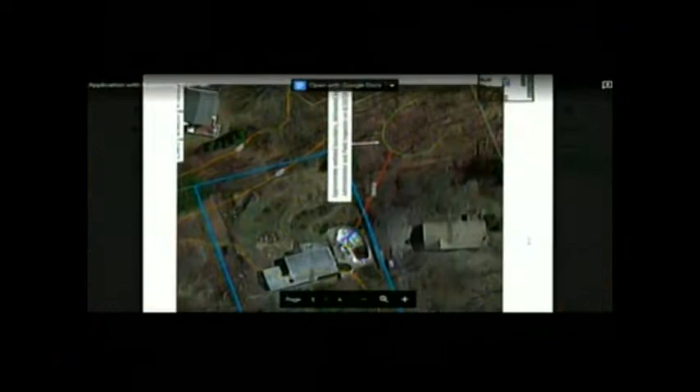At the last meeting, the commission asked for a narrative explaining construction access and intention to remove compost and yard waste within the 25-foot no disturb zone. The applicants had informed the commission they'd be on vacation this week, so they wouldn't be able to make it, but the commission said that as long as we get a narrative to this effect, that would be okay.

So they will be accessing the area of work from the front of the house, down the driveway and the front of the house, which is out of the buffer. They have existing fencing that separates property boundaries. They will be removing the stockpiled compost and yard waste from the no disturb zone, and they will either burn it or put it into the pool that's going to get filled.

So, I did watch the video on that, I know that's his response to this. I cringed when I watched it. You cannot put compost as backfill in your pool. So we're not going to let that happen, okay? Because I don't want it to happen.

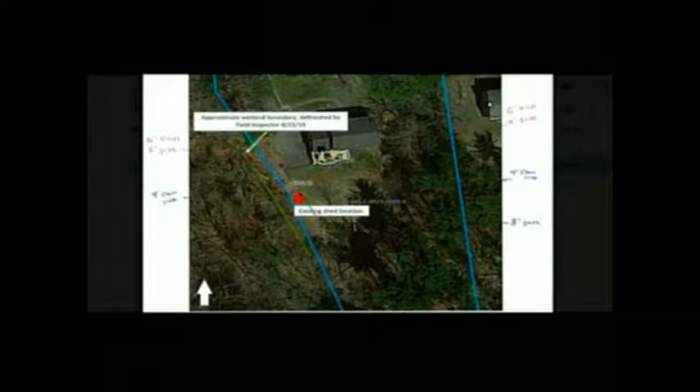My thing is, if he brings the fence forward and he's outside the 25 and it's just like hand-dug posts - we don't know where the wetland is, or where the 25 is, or the 50, on any small project. Well, I'm saying that's why I asked for an RDA, so we know where the wetlands are, where the fence is going to be.

Well, I think it's a discussion you can continue to have with staff. I mean, it may be barely an RDA. Well, there may be other things that he wants to do with the property, which may change things down the road. And the fence, maybe, once the wetlands get delineated, he'll have a better idea of where the zones are and where he was thinking to do other things.

Fair enough. I think there's other plans, it's worthwhile. It helps, it's a planning tool that can help him make other decisions. Yes, exactly.

When you were out there, it looks like the wetlands start right at the edge of my property. So if I put a fence 25 feet in from that, essentially it's a fence going down the middle of my yard. So I can get the official delineation done, but I'm just concerned because I know that's also expensive.

I called some of the consultants - they charge $500 to $800 to do surveying and delineation. So I just want to make sure I can go through that process, that the fence is reasonable, before I spend all that money through the delineation process. I'm just not sure if you guys can provide me guidance on that.

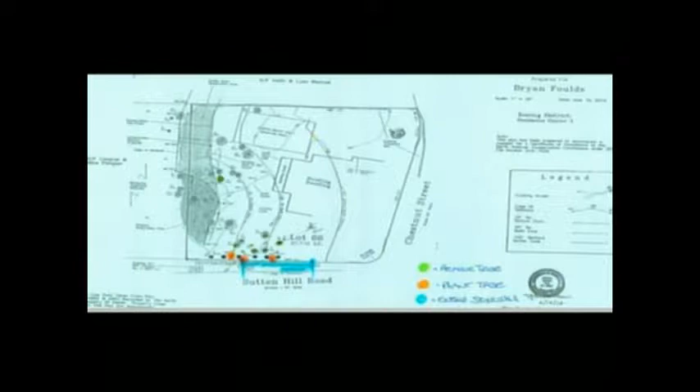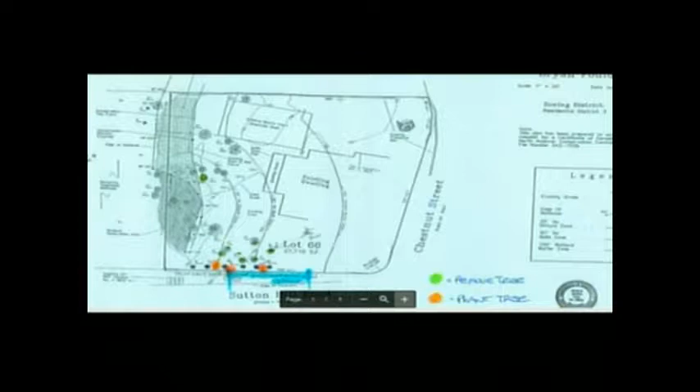Ben had conducted a site inspection, initially just for tree removal, to see if there's any discussion that needs to take place prior to moving forward on any of it. There are 9 trees coming down, in the backyard and a few in the front, the ones in the front being in the outside buffer. Most of them are dead or dying or diseased, and it was very obvious to Ben when he did the site inspection that that's the case.

So the green markings are the trees that are coming down, and the orange are proposed replanting. There's also an existing stone wall for part of the frontage along Sutton Hill Road, and the applicant wishes to extend it, shown in the blue.

So I'm seeing most of the trees to be removed outside the 25-foot zone, but I am seeing one that's... there's one back there. It's got about half of the base left in it. So what do we know about that, Amy? We have a picture of it. So the base of it is rotted, and it's spindly.

So it's already, even though it's very close to the wetland, it's already in an improved lawn area. So we'd allow it to come down, but they wouldn't excavate the stump, they could grind it flush for them. Wouldn't even do that. If you look at the one right next to it in that picture, the stump is protruding out of the ground, so they wouldn't have to go through the ground.

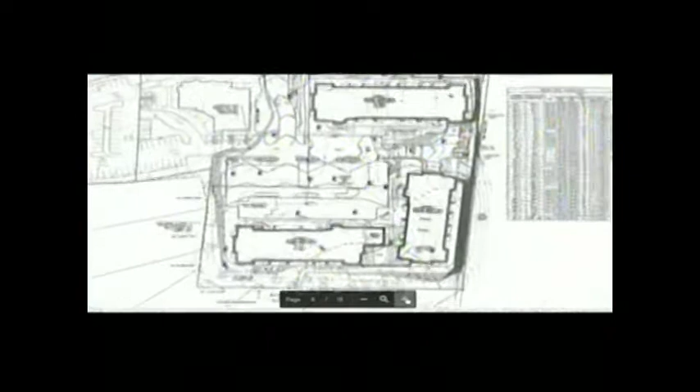So since the last meeting, the planning board closed and approved the project. I conducted a site inspection with the wetland consultant, project engineer, and abutters. And we have the final revised plans here up on the screen. I'm going to ask the project engineer to give us a briefing, and then I asked him to do a visual for pre- and post-watershed, so we understand where the water is going pre and post on a visual level.

Good evening, thank you for having us tonight. For the record, my name is Scott Cameron with the Morin-Cameron Group, 66 Elm Street in Danvers, Massachusetts. Here on behalf of Sutton Street Redevelopment. Thanks for having us tonight.

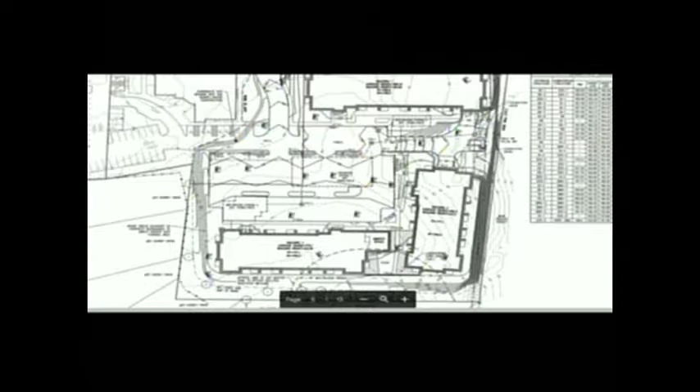I did bring with me, and presented a little bit of this at the opening hearing, we had a close look and spent a lot of time back in the area on the property. I know there's been some question about what's going on with the grading along this back area, whereas the rest of the property is pretty distinct where everything's going. You have a very flat area through here.

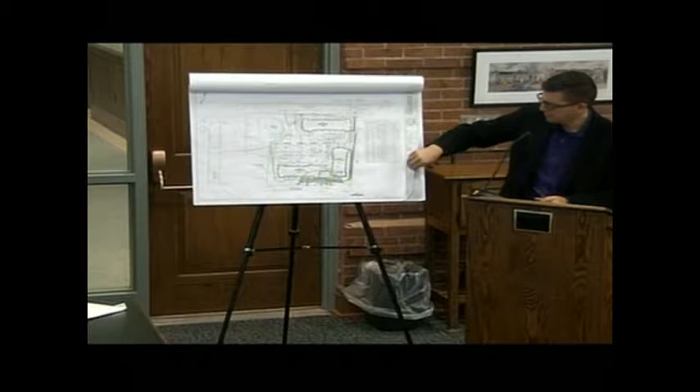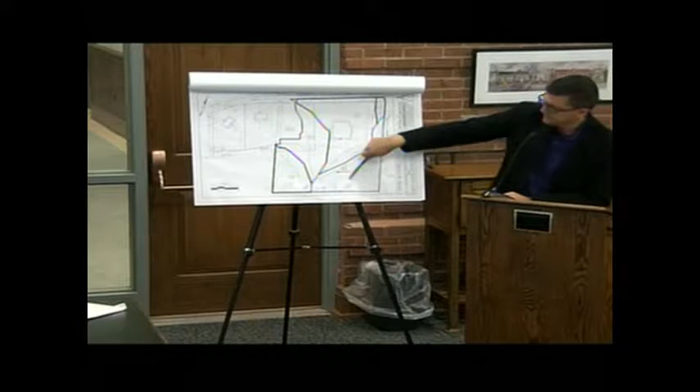When we were doing our stormwater analysis, I'll just pull up the existing conditions plan. This is the watershed plan that was in the drainage report, I just blew it up on this board. Really, there are four distinct watersheds you can break out on this property. They go to different locations. The one we're really talking about is where the isolated wetland is, off-site with the buffer zone coming in, and this blue represents the land that's immediately adjacent to that.

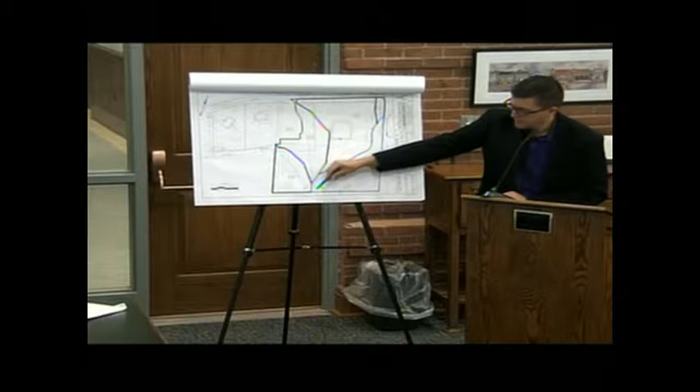The design point we modeled for this is more or less along this entire edge abutting the China Blossom Restaurant. The reason is along this lot line, and it's subtle, but if you read the contours, no matter where you pick a point for a drop of water to fall, that water moves away from the lot line. You measure perpendicular to the next contour, typically, and it comes down. Then you go out in the field and take a close look, and you can see why.

It's very flat back there, there's trees, and it's lumpy in some areas, but the grade, as you stand there, you can see it—it's subtle, but it does go either parallel to or just away from the lot line, and all this comes down.

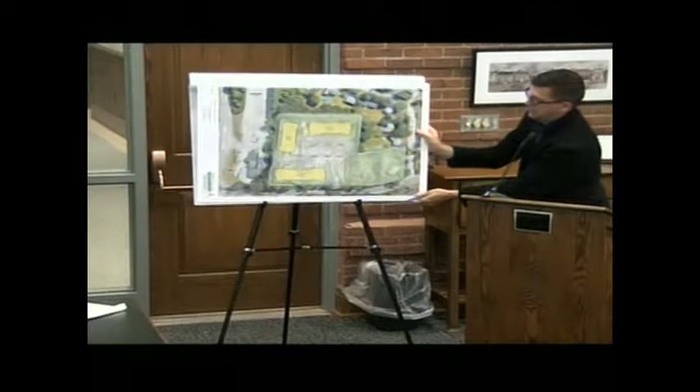Flip over here—this is just an aerial shot of this area. The water comes down and goes in this direction on the parking lot, and at the end of the parking lot there's a more defined ditch that goes down to Osgood Street. So that's where all the water's going. It gets channelized as you get down here, more so on that end of the parking lot, and that's where the water goes from here.

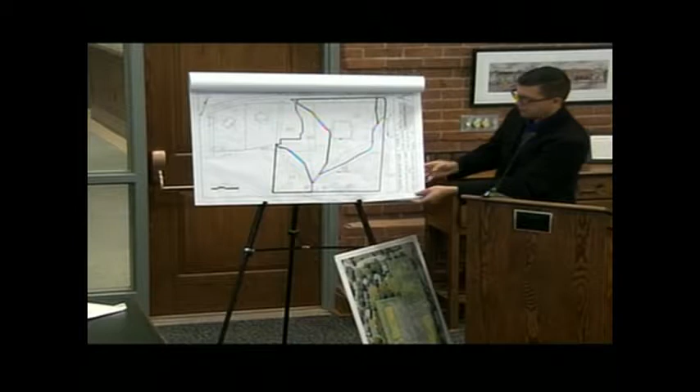We're mindful that during the design, the peer reviewer who did the stormwater design for the project asked us to take a close look at that. That correspondence back and forth appears in the peer review comments.

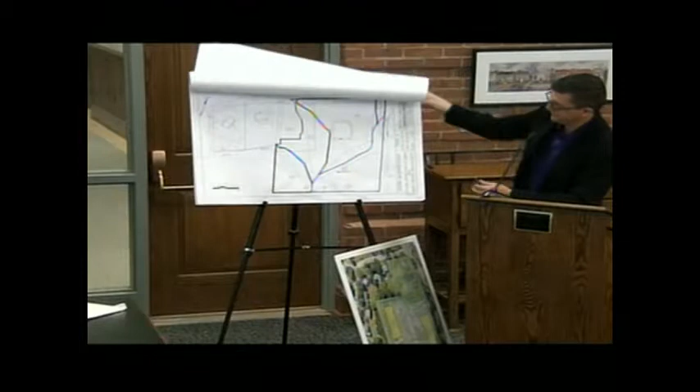In the post condition, this watershed area—in the drainage report it's about 42,000 to 43,000 square feet, the footprint of this area. None of that goes in this direction; it all goes towards the China Blossom property.

In the post development, same blue, and I've drawn the orange just picking points and seeing where the water will go if we follow the contours. The footprint of this area is 23,000 square feet, about half the size, because we're taking a lot of it with the buildings, and we're bringing all that water in towards the stormwater management system in the center part of the site.

We're filling along this edge, raising the grade especially on the China Blossom side. There's some subtle grading down along this edge, but we've very distinctly provided a swale. Again, because we're not touching anything between about 20 feet here and about 13 feet down this end, that's beyond the limit of work, so there won't be any change to how the water flows there. Water will come down.

The only water that will get there is what falls between the edge of the building and the property line, and it's either going to come down and go this way, or land here and come back this way, which is what it does now. We looked at this thoroughly—I've spent a lot of time out there on numerous site visits, during different weather events, and looked back through historic USGS maps to see how the land has shaped over time. I feel really confident we're not going to have any issues back there.

One of the last changes we added to the plan, on the 8/29 set, is that note right in the middle of the plan: 'existing berm to remain.' That was something the peer review consultant asked us to put on there, just to memorialize it so somebody looking at the plan—if they can't figure it out standing there—will call me, or call Amy, or somebody else, asking what it is. Probably me. That's what it means, and we'll explain that.

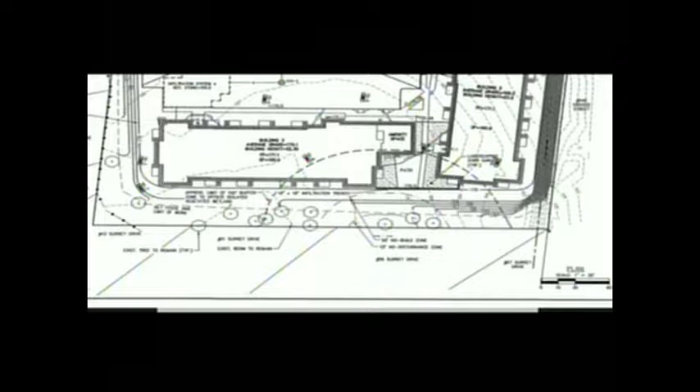So that addresses the abutter concern pretty well, and I understand the satisfaction that might give people. But you kind of lost me when we were talking about watersheds and what was close to an acre becoming now half an acre.

By putting it into the system out in the parking lot, it's mostly infiltration, until it gets overtaxed or over-demanded. At that point it has an overflow structure which goes out to the Sutton Street drainage. This is a divide between two different watersheds, because Sutton Street goes down to the Merrimack River, and this goes to Lake Cochichewick.

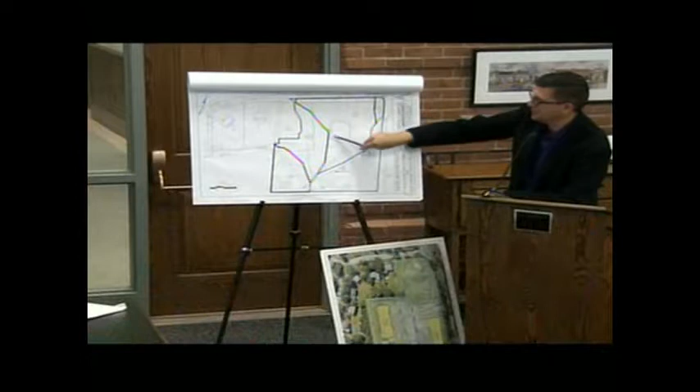It's a tricky area—we've spent a lot of time out here standing around looking at the watersheds. This is the existing plan again, showing the existing building on the property. ES3 and ES4 come down and go to Sutton Street, heading off towards the Merrimack River. ES1 and, in the future, ES2 all end up going towards Lake Cochichewick, which was actually called Great Pond back in 1893.

I did go back in the maps quite a ways, and these go down to that system. Now, what we're designing for at the design points in both scenarios is making sure that we're reducing the peak rate of runoff, and in most cases, the volume as well.

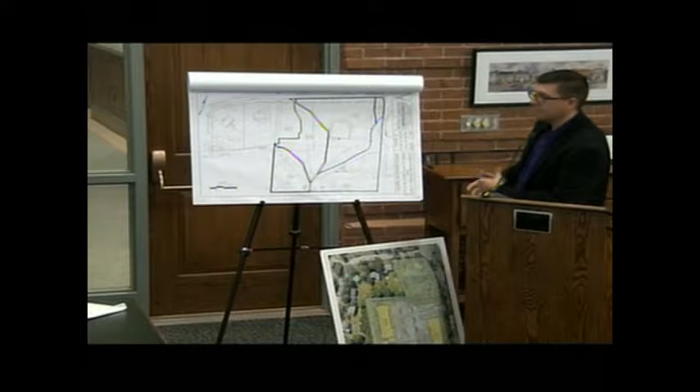We did also go through and inspect, because we're going to do a direct connection into this drain system. We followed this system down, got the town maps, went down on the other side of Osgood Street, and followed all the outfalls. We couldn't find the pipes—it was really thick growth, but no evidence of erosion, no evidence of issues. It looked like everything was very well stabilized with all the vegetation.

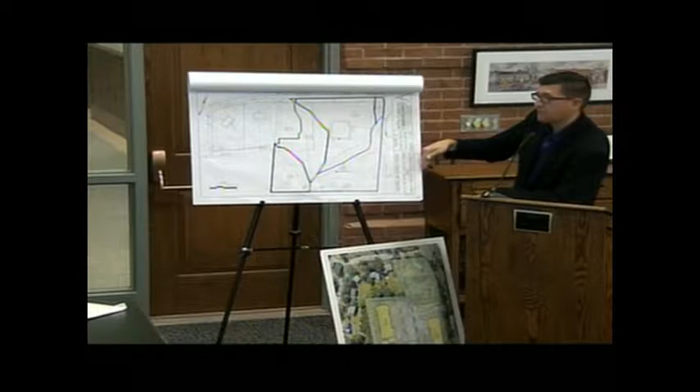So this system is able to handle this because we're reducing the peak flow rate, and for most of the storm events, the volume as well. And we can change where this is going. We're taking a lot of the load off of the China Blossom side, so along this boundary we're taking a lot of the water off of that. And the benefit really, this is a huge benefit.

Again, all this water is going down to Lake Cochichewick anyways, but right now it all just runs across that parking lot, untreated, picking up everything in the parking lot, and that carries down to Osgood and overwhelms Osgood, and then that goes out.

Where we did see erosion was at the catch basins on Osgood Street. You can see them—there's holes next to them. So that's telling me there's a lot of surface water on Osgood, so let's get it off the street, get it in the pipes underneath, and it's out and gone. So that was a huge benefit on that sideline. And the buildings themselves will pick up groundwater and anything else that may be coming out in that direction.

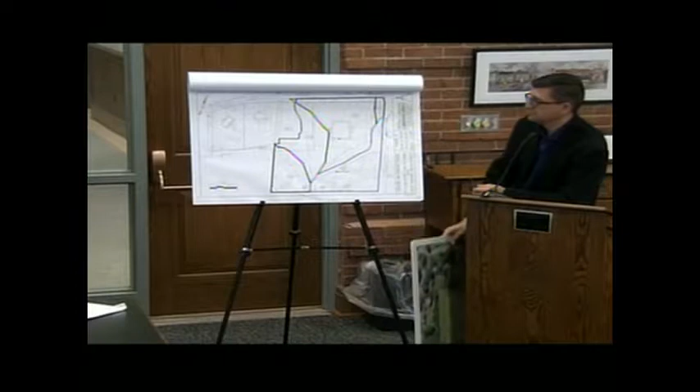Okay, so I'm satisfied with the abutter concern, and I'm satisfied with the division of watersheds on a nominal type of storm where the infiltration system is acting as infiltration. It's those peak storms—so the ultimate discharge, the back corner is going to go always just as we described, but only half the acreage, one half of an acre. And all of the other, half of what's remaining, goes out to Sutton Street and down to the west, eventually to the Merrimack watershed. My concern is, on an overflow or design high rain event, what sort of mitigation are we getting going down to that ultimate discharge to the Lake Cochichewick watershed?

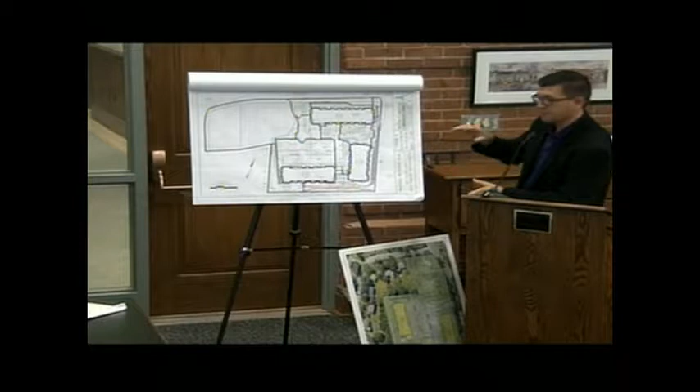All storm events, up through the 100-year storm event—you're controlling on-site, slowly discharging. So yes, we're infiltrating always. It's always happening; even in the big storms, yes, it fills up, and even on the small storms, we're still releasing small amounts of water. But we're replicating the recharge that happens on the property now, just from how it is compared to how it will be. We're replicating that and increasing the ability of it to recharge.

So right now, anything that falls in the front parking area of the building, that's all just going right off the property. We're holding 100% of it and giving almost 100% of the runoff from the site a chance to get into the ground. So we're really making a great effort.

I apologize, it was a month ago. But in the area where you are doing recharge, infiltration, you've already done soil borings and... Extensive, yep. And all those soil borings appear on sheet C7 in the plan set.

They're actually deep excavation test holes, where we got in there with the excavator, opened up a test hole, pulled the profile, went down as deep as we could, measured groundwater—not standing water, but what we observed, evidence in the soil. So we're looking for staining, rusting of where the water fluctuates. It was very distinct through the whole property, about 3 feet down, very distinct.

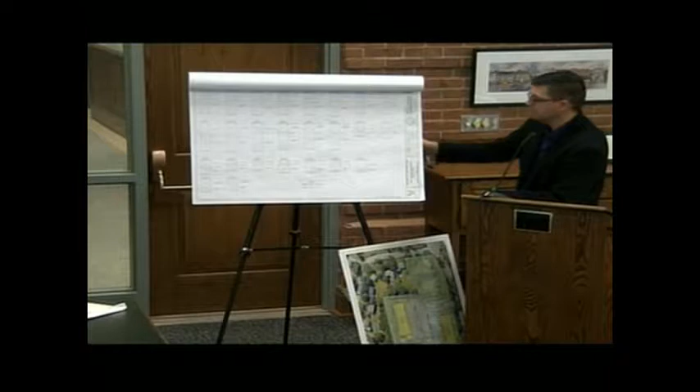Consistent, and it was 3 feet down from existing, so we'll be filling the site. You'd need to be 2 feet above that, right? Yep, 2 feet to the bottom of the systems, and then you have the system, and then you have your road or whatever's above that. Actually, the drainage didn't drive the finished grade of the site—it was close, but what actually drove the finished grade of the site was the sewer.

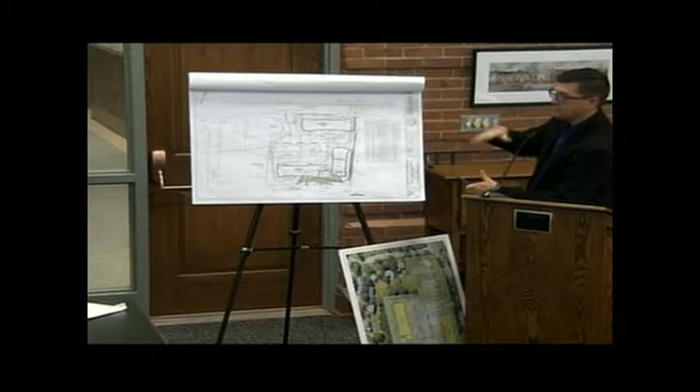And the reason for this is because we did it first pass based on drainage. That's usually what's going to drive the grade. So we had groundwater come up 2 feet. We design our stormwater system, we do our pavement, and that's usually what's going to drive it.

In this case, the site is pumped right now, so it goes to an ejector pump and pumps up to the system. We're right at the end of the gravity system here out in the street. But we were able to get a gravity sewer service from the property by lifting the site up just another foot, so it was only another foot higher and we were able to get everything out by gravity, which is a huge benefit. Any pumps we can remove from the municipal system is a benefit.

It's just the chemistry behind effluent. We want it to be exposed to air and gravity and not being artificially pumped.

Yeah, okay, I'm all set. I'm all set now. I'm good, okay.

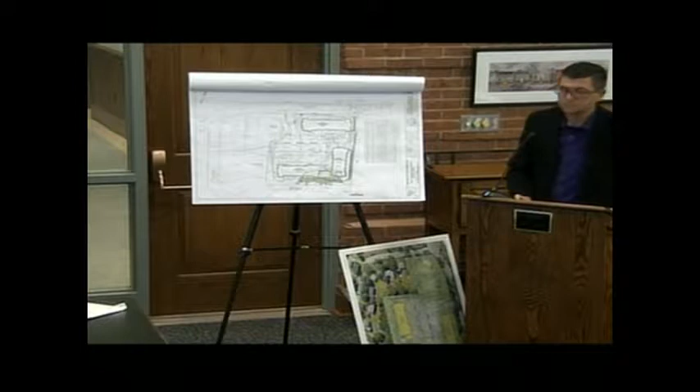Well, I saw the plan today and I was expressing some concerns. My concerns are the abutters, because their yards are wet to begin with. I just did not want to see any more water. In your narrative you mentioned at least 3 times that you were not going to let any water come off that site, that there is now, to make these people any wetter.

The China Blossom side, it's like a 10-foot fill in some part. Yeah, there is a fill slope on this edge. You're right, but it's all been cut in and manipulated anyways, so walking through there, it's not stabilized. You can see erosion happening now because we've just kind of cut and let it grow back. So this will be a secure, stabilized slope.

And the important thing here is the stormwater that is eroding that slope now and going across the parking lot, we're taking that burden off of it. So this will be a better situation afterwards.

Now, the water you say is running through these properties and going out to 125, that's not going to happen anymore? No, we're taking most of that burden off of the property. The only thing that will go this way is what lands between the building and the lot line, so just drops of water that fall in that area, about a 40-foot width.

All right, just as long as you stay committed that none of the abutters are going to get additional water, because you had an abutter here and you did a site visit with them. Wasn't at the meeting. Was that about a Saturday? You guys did the site visit. Were able to get on his property? Not on it, right up next to it? Yeah, we spent a lot of time right here.

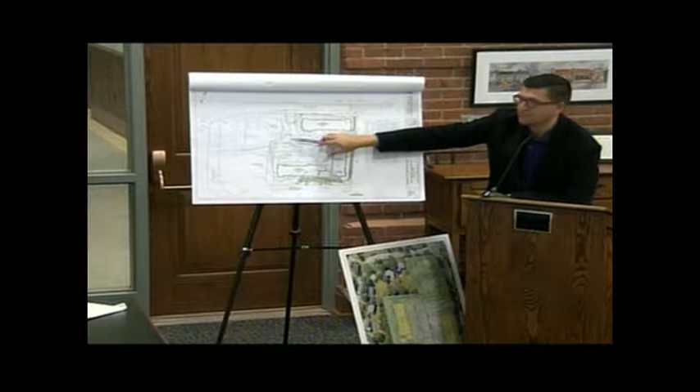The way we engineered it, there's a shared driveway here. The high point's right at the intersection, and we actually end up with a dead-end aisle here. We did put a landscape divide here to make sure we have a distinct boundary between drainage systems. So they've got their design, they've got their maintenance plan, we've got our design, we've got our maintenance plan.

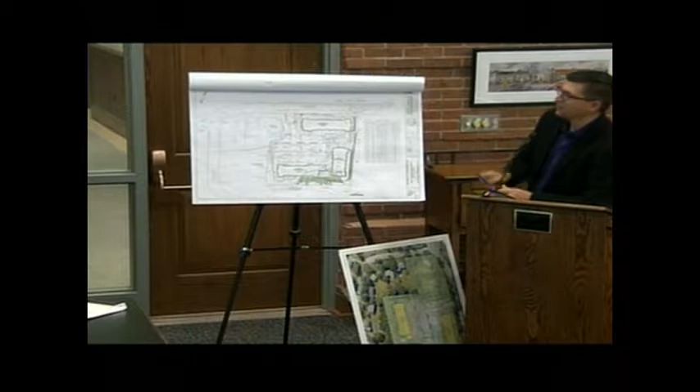Oh, we haven't seen any of that yet. Well, I was concerned, I saw no elevations. On their side, yeah. On our side, what this is showing is kind of how we're going to grade the edge.

More than likely they're going to be ahead of us in construction if things proceed forward. Yeah, we expect so. There's a lot of buildings to design here. Well, it would be nice if we saw something.

As far as stormwater issues, what are they going to do with their water? They're going out in the other direction, out to Sutton Street. All that stuff is on file with the planning department. I know they're not jurisdictional with this commission, but it's certainly all down there.

So it's not jurisdictional? No, it's not. No. Right, and that's fine. They have a combination, similar to this, they have a combination of subsurface, and I think they have some surface systems in there too, small rain gardens, I think.

I just worry about the abutters because that whole area is wet. The park down the street is wet too. That's why I asked about the borings, but I don't know the soils. I just remember that whole area being sopping wet as a kid. And across the street's dry - go figure. And that's in the watershed across the street.

But okay, Deb, Sean? So the water's going underneath the parking lot? Yes. Is there an existing subsurface system? There's nothing there now, no. And that's a separate landowner?

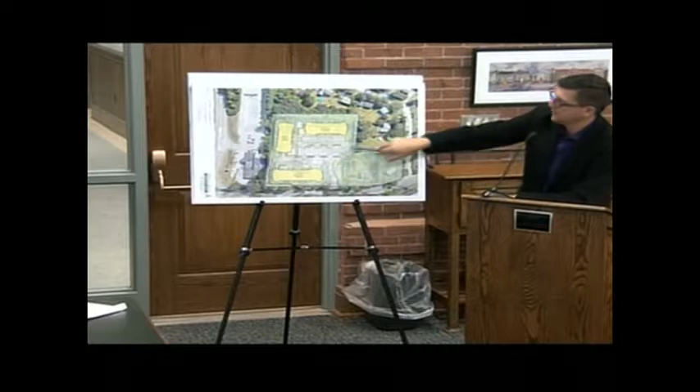So what's going to happen - this shows it. So they're actually donating this portion of the land here that is being given to the town, and then this will be leased back to the town, however they work those terms out for the parking. So that becomes the senior center area, and then that's the multifamily.

And the part that abuts the parking lot for China Blossom, I think you were referring to that part of the property when you said right now it just sheet flows down and goes across the street, and you see a lot of erosion there. Is that going to have a subsurface system underneath it, or is it not just going that way? We're just not letting the water go that way, for the most part.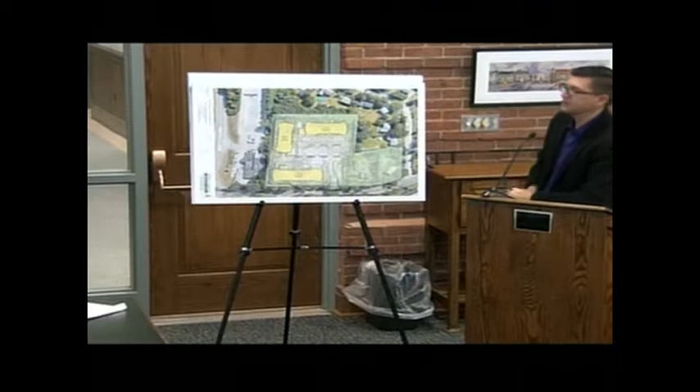There are some catch basins there now, but they're old. There's 8-inch pipes, they're clogged, they're not doing much. So they might handle some small rain like tonight, but anything of intensity that we really engineer for, it's going straight off the property.

You have a follow-up question? So we've talked an awful lot about the existing condition and the post-condition, but this site is, you might as well say, nearly 100% developed during construction. So I think your worst design event is in fact what you do with stormwater management during construction. I really want to see a narrative on that - break it into phasing if you have phasing in mind. It won't be phased.

So there's several measures. This will fall under the EPA National Pollutant Discharge Elimination System, Stormwater Pollution Prevention Plan. That will all be in place. North Andover has the typical conditions, environmental monitoring, which will be on site.

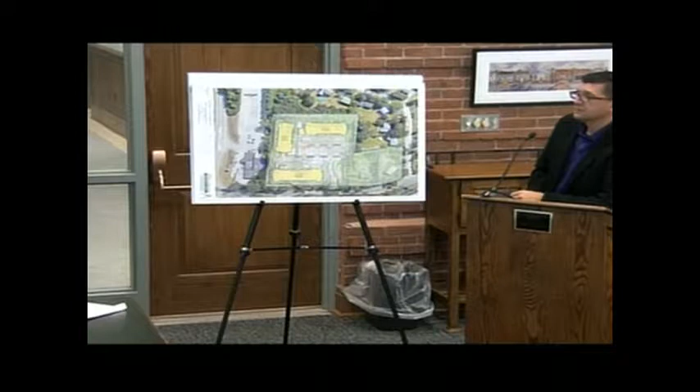Those are words. I'm looking at the practicality of undertaking all of this on a relatively flat site. It is great to break the site into watersheds and to capture it and control it in the future, but the whole time it's under construction with clearing and grubbing and grading - the weeks and weeks that all takes place before you dig into deep foundations. You know how construction works - you could easily have several months of vulnerability that is going to be very difficult.

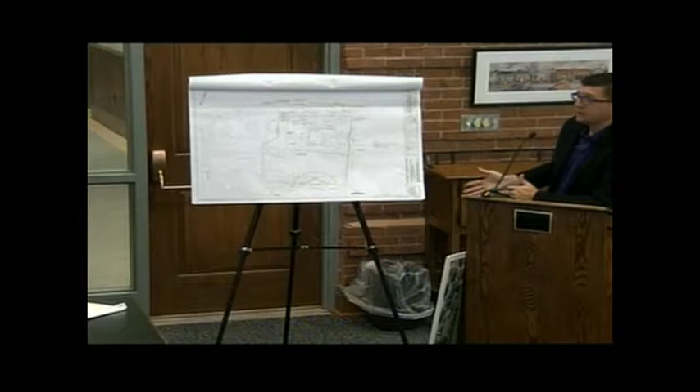We're, yeah - with the conditions of the soil on this site, we do have our preliminary sediment and erosion control plan in the set. Happy to provide the final SWPPP that we register with the EPA during the construction documents period. But some of the areas, obviously, we highlighted this edge with the slope - very robust, double staked hay bale or heavy sock system with the silt fence. That will be an area.

What is nice about this site is, for the most part, it's already all cleared, so we're not going to have that initial clearing of trees where the land just gets ground up. We're going to be able to keep whatever paved surfaces we can in place, and whatever grass surfaces - actually it's been all mulch since they've been staging for the Columbia Gas repair work. Whatever we can keep intact.

This will be a site - we're very familiar with this type of soil condition, minimizing disturbed areas. We're doing another one with the same applicant in Newburyport right now, which is all clay, pretty much your worst type of soil to manage during construction. The only thing that's opened up on that site right now is the foundation - that's it. Pavement stayed, we pretty much kept that stabilized base on the rest of the 3-acre site, similar size. So I'm confident we can handle this one.

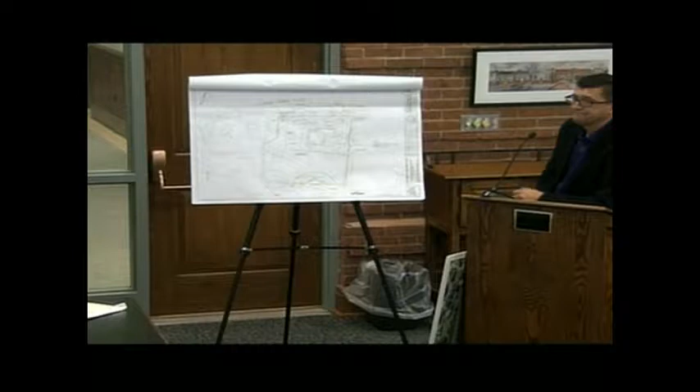More questions? Motion? Any abutter input? No questions from the abutters. Amy, do you have any comments, concerns, or questions? No, because I was kind of looking for this presentation for the stormwater pre and post conditions.

Are you satisfied with the calculations? Yeah, Horsley Witten is satisfied. Also, right? Yes. No, just figured, that's fine.

I did draft a decision in case the commission was interested in reviewing that tonight after closing. Motion to close and issue in 21 days? All those in favor say aye. Opposed? That's unanimous. Thank you.

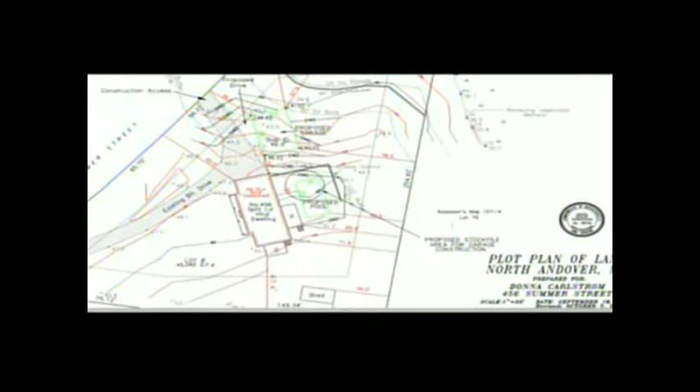Regarding the stockpile location, that is not shown on the plan you have, but it will be outside the 100-foot buffer zone where the proposed pool is going to go. It's actually shown on Amy's plan — I got it last minute. Amy requested erosion controls around the proposed pool, and we provided that.

We're proposing the work up to the 25-foot line. If the commission recalls, this client received an enforcement order for tree removal, so we do have to pull these stumps, grade this area out, loam and seed it, and stabilize the area. The garage is proposed 51 feet away.

Oh, we did receive a DEP file number. No comments.

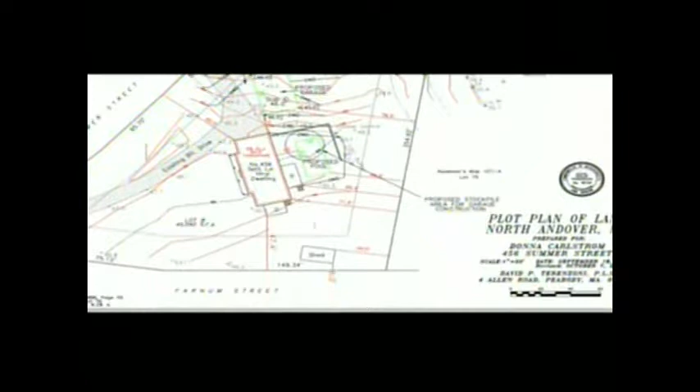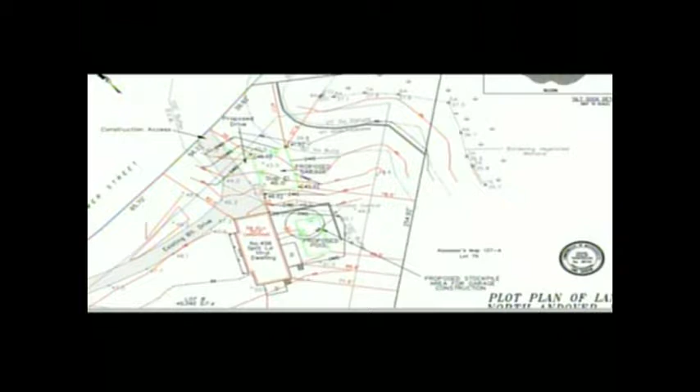Right. Okay, all right, so let's get back to the permanent barrier. Do you want a permanent barrier? I only interject with that because if there was a septic, this garage placement and how we get there may have been a factor to moving it.

Okay. Rest of the commission, how do they feel about a permanent barrier? Well, I recognize it's an old house, but I also recognize that you don't have to build a garage at this time. In a sense, we're building the garage at this time. The bylaw comes into play, and we typically require a permanent physical barrier. What I'm hearing is there's no disagreement on that. The disagreement is what degree of permanence do we see versus what the applicant and the representative sees.

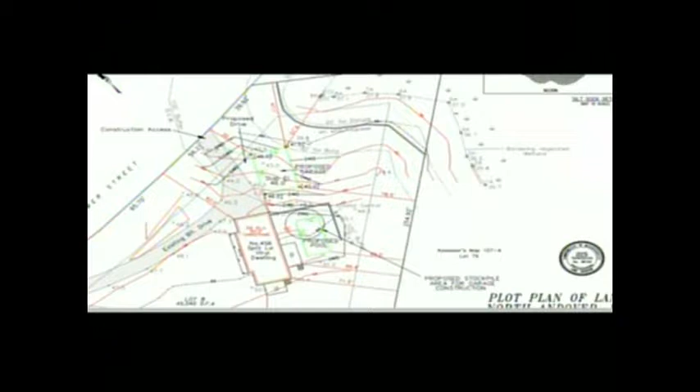We typically see it as a stone wall. I recognize the length of that stone wall. If it goes along the entire 25, it's almost as valuable as the garage itself. If you build a 2-foot high by 2-foot wide stone masonry wall, by what we would typically require, it's almost not as expensive to do. It's not masonry, it is stone, a mason has to build it.

Now, you could put a farmer's wall in, what's called a farmer's wall, which is not 2-foot by 2-foot even, it's stones piled up. Sure, yeah, that's what our detail is. You could do exactly that, or you could put large stones that could be a few feet apart. So, a loose, dry-laid stone wall, farmer's wall is a great phrase. That's what I would typically require, that's what we always require. There's never been a masonry wall. There have been some applicants who come in and propose that, and there have been some who built those.

Not required by us. We always, when we require a wall, it's a dry-set stone wall, what this commission would call a farmer's wall, 2-foot by 2-foot. It's very loosely described. Doug, you weren't around when we had to come up with the definition.

It was because some people thought that river stone or keystone strung out along the line equaled a stone wall. We got hit with 300 feet of pea stone. We didn't define what a stone wall was, and we had to eat a little crow. We didn't have a definition, so there was no way to stop it. He was technically in compliance, even though it was ultimately the most contemptuous thing I've ever seen.

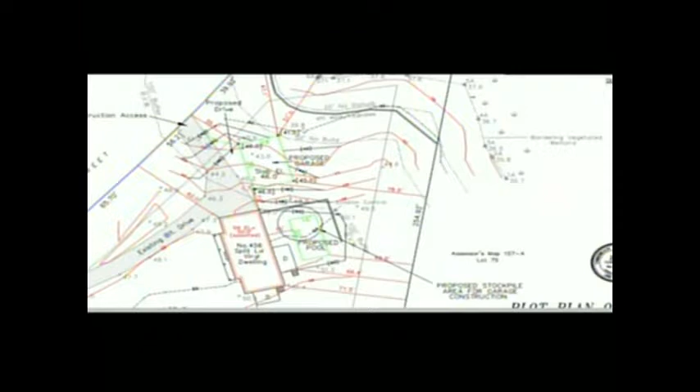That's not what he's proposing to do. No, he's gonna have a high wall. This frost wall we talked about earlier, it's not a slab. The slab is at 46 and his back corner is 42, so he's gonna have 4 feet of exposed concrete before you get to existing grade in the backyard. That's why he's able to chase the slope up, because he's using the garage as a retaining wall. The back wall and the side wall of the garage is a retaining wall.

So you're saying it's fine, he's not gonna slope? Very gradual. The existing grade is 40 feet 9 inches. The existing subgrade is 43 feet.

Can you view the plan? On the Summer Street side, you see it looks like spider legs coming up? He's got 46 coming into the corner, 44 coming mid-wall, 42 to the back corner, and then 40 is where he's matching existing out there in the dash line. That means that whole wall, even if the slab's at 46, that back corner is gonna have 4 feet of exposed concrete, which is fine. But that's how he's making the grade work.

Yeah, because the back of the garage is 42. What you are gonna get is the rain. I imagine this garage roof slopes front to back, given the layout. So that front half of the roof will be coming to the driveway, and the driveway will either drain directly to Summer Street, which won't be allowed by the town.

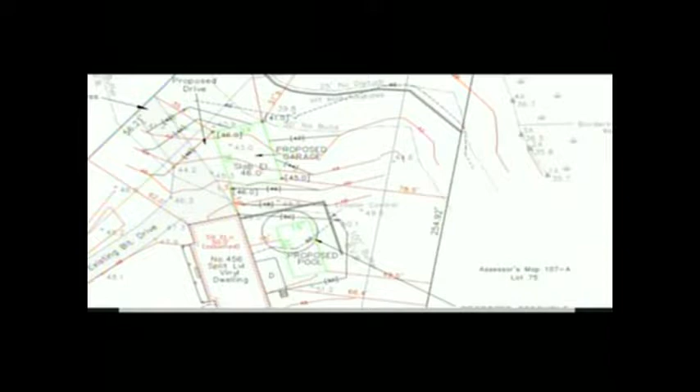So that runoff from the garage and the driveway will all be going directly to that corner of the wetland. There's some work that needs to be done in this plan. I think we continue it, and they go back and address drainage, and address what they're gonna do to rebuild the driveway, if that's what they're proposing. Collecting roof runoff into an infiltrator is one piece, but the driveway is a second piece, so you've got to control that as well. I think there needs to be more thought into it before we require the wall, because that's a requirement anyway.

That seems to be the least of our concerns right now. Cost-wise, if they turned the garage so it ran parallel to Summer Street, they could put a driveway there and eliminate that long driveway they have now. And we allow driveways in the 50. Don't you think that would work better? They must have gotten to some point where they made the decision to orient it the way they did.

I'm not gonna second guess that. Right, but because they made the decision, there are some things that need to be shown on this plan to get built. So you're concerned about the roof runoff from the garage, the existing or proposed square footage of additional pavement. Right now, where that driveway comes off Summer Street, the runoff flows down the driveway that way. You just steepen that slope at the top by an additional 2 feet, you made that slope steeper.

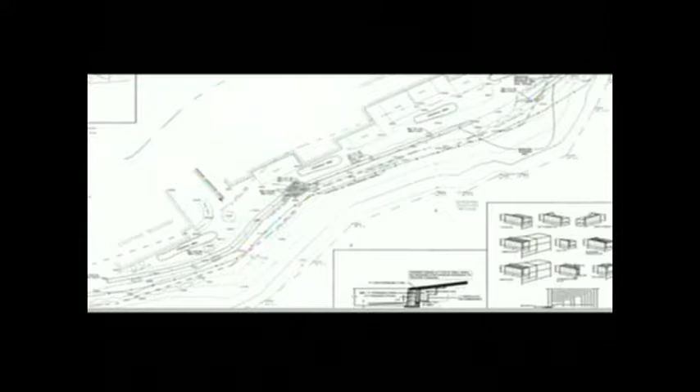Just want to be clear, so the existing rubble wall that's there, you intend to just leave in place? We're going to leave it. Everything built has to be stable. I looked at it from a stability standpoint and it doesn't appear to be failing. The issue is that wall is there, and then they built dirt up like that, and all the fines have worked through, so the top is pulling off.

So the typical wall cross-section is just that, it's typical. You've got a drainage interlayer where you're intercepting any water moving through the horizon, and a drainage tile at the bottom, or near the bottom of that.

How does that daylight anywhere? Yeah, we daylight at the end of the wall. In this case, because the wall is short, we can just pull it down to the end and pull it out. We may, if there's not a good location at the end, pull it out in the middle, like on this wall. The boulder wall is behind it, so we might notch that block out and pull it out there.

That's actually what I'm looking for, is to minimize the number that could become point sources. So if you had a number of weeps on a periodic basis, then it performs the same function. Right, the most would be 2 on each, because it would be at the ends. The most would be 2 each.

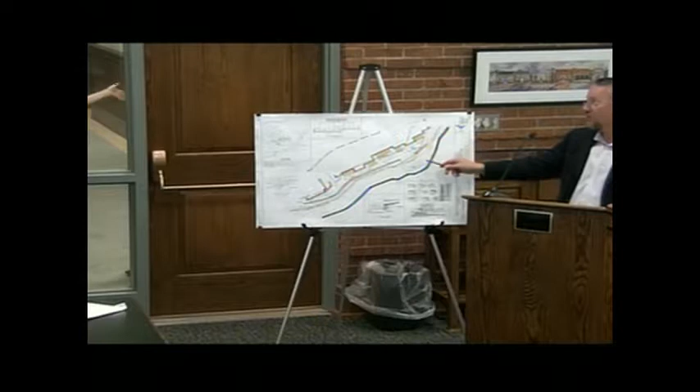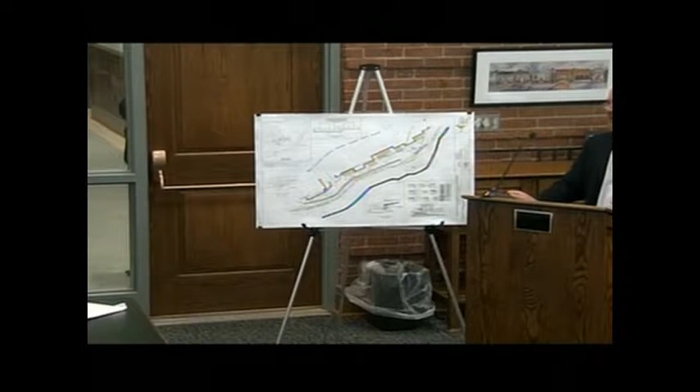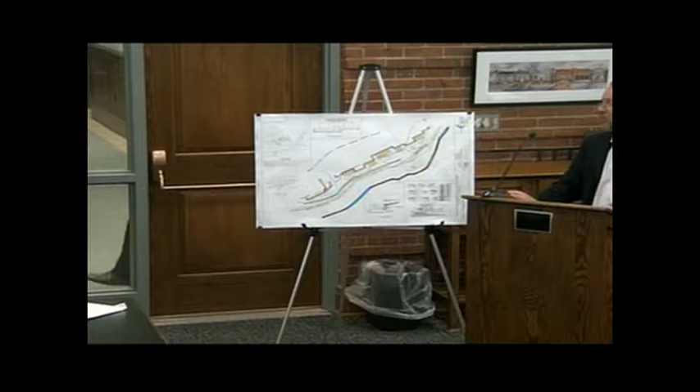Which I'm guessing will be right around six outlets. I don't expect there's going to be much high flow from that, because the watershed is so small. So the highest, this is 5 feet? Typically it's closer to 2.5 feet, I'd say the average is about 2.5 feet. So it's not very tall.

Relative to the bottom foundation elevation of the buildings, we're not anywhere near that. No, we're going to be above that. So we're not going to be picking up a whole heck of a lot of groundwater here. Correct. All right, I'm all set.

I'm all set, Mr. Chairman.

Question, is there a break in the wall up there, above? I don't have my packet with me. Are there 3 walls? Yeah, there are breaks in the wall. This is a piece of rock, so we're going to go on either side of that. And in this location, we don't need to put a wall there, because there's not an issue here. Okay, that's why I was asking.

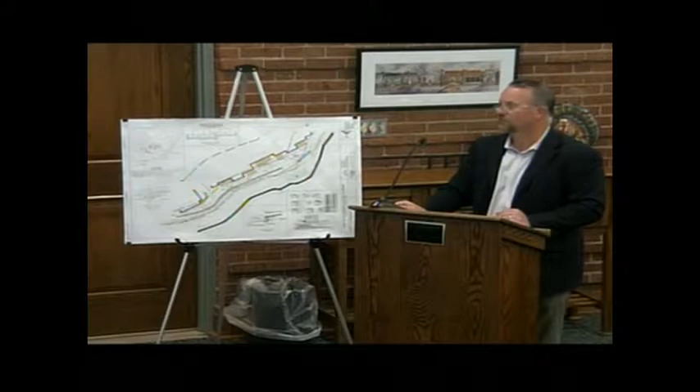Okay, I don't have any questions. No question. Motion? Oh, but we haven't - well, I want to see if Amy...

So your narrative says the trench or excavation width would be 2 to 3 feet wide, is that right? It sounds like the blocks you need are 2 feet long. It's 2 plus a foot, so it would probably be 3 feet is what the width would need to be. Okay, and then how far down again?

The depth varies based on the height of the wall, but on the low side we're only going down about 9 inches. On the upside, it depends on the height of the wall. There are places that will be a 5-foot excavation, and places where it'll be 2. I gotcha.

Okay, and then the base won't be concrete? It will not - it's going to be crushed stone, not concrete. The manufacturer allows 2 different types of bases, either lean concrete or crushed stone, and we're going to use crushed stone, and we'll agree to that.

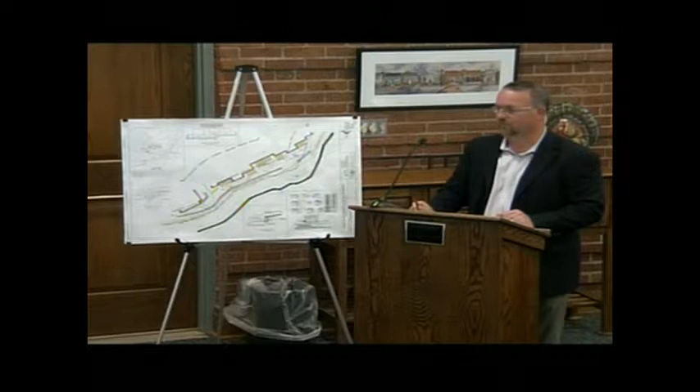Okay, so then you can open it up to the public. Do you have any abutters' input here? Any abutters have questions or comments or concerns? Anybody at all?

I'm concerned about the concrete and the crushed stone.

Can we get your name and address? 1804 Dogwood Circle. She wants to know why you're using crushed stone and not cement?

Typically, we use crushed stone. Almost every wall of this type has a crushed stone base. They allow concrete in certain situations - what that does is let you form it exactly to the shape of the bottom of the wall. But in this case, we don't need to do that, and it's much easier to bring in crushed stone than to pour concrete. So crushed stone is better.

Excuse me, let me jump in. The wall comes behind this building, 1800, where you access between the 2 buildings. Is any of that retaining wall going to go past building 20? It goes down to about the corner, where the building returns, because there was an issue identified at that location - it looked like it's been sloping since I moved in, so I didn't know if it was only behind the 1800 building. No, it is extending out to that corner.

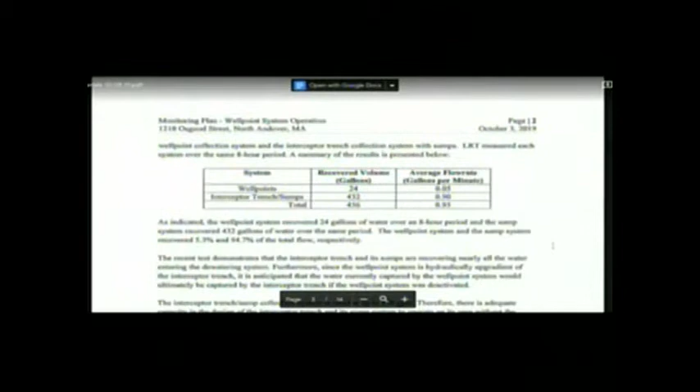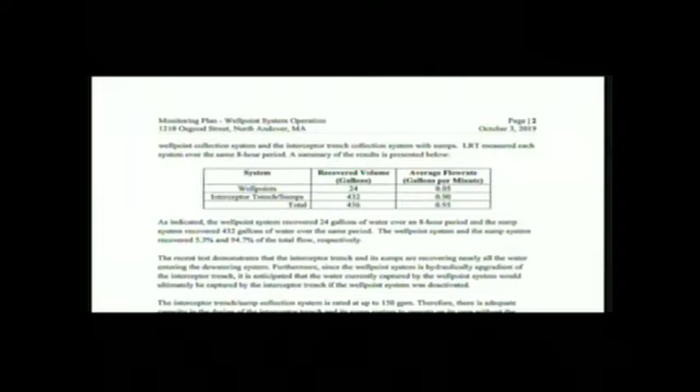So the proposed testing that would lead to the modification of the plan is - right now we have one day of relative flow measurement readings in the letter you've received, but our plan is to collect 5 additional days of relative flow measurements between how much water is being collected by the interceptor trench and how much water is being collected by the well points, and what those relative flow rates are, for 5 more days with both systems running. Then we would shut down the well point system and just run the interceptor trench only for a week.

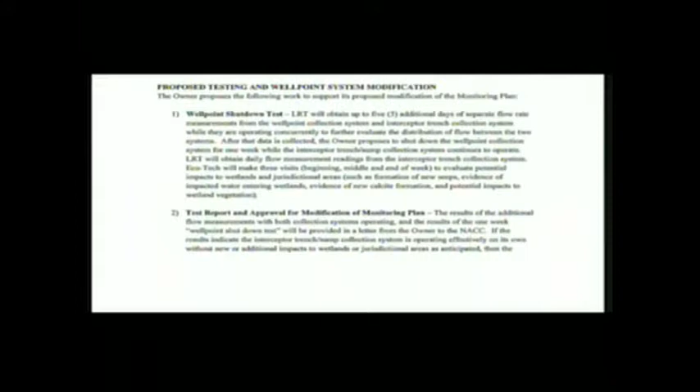We would collect daily flow measurements in the interceptor trench, and during that week, Paul McManus from Eco-Tech would do 3 inspections of the wetlands - beginning, middle, and end of the week. He would be looking for changes to the wetland areas or impacts that may differ from with both systems operating, looking for new groundwater seepage areas, new calcite formation in the wetlands, stressed vegetation, those types of things, or any evidence of impacted water entering the wetlands.

Something that might help frame it - when the original plan was submitted, the interceptor trench was the supplemental system. Essentially what we found is the supplemental system is doing better than the primary system. Well, that's what they're finding. So we're flip-flopping which one's going to be your supplemental backup, if that helps.

Have you been able to isolate and measure the pH levels coming out of the well point system? I don't know. I don't know as we've taken those measurements, right? It's virtually indistinguishable between what's coming out of both systems.

How do you make that determination? They have different influent lines into where the water treatment system is. So the tank - there was a picture, the last picture in the LRT letter dated October 3rd - that tank you see there at the end, that's the beginning of the water treatment system.

That's the edge of the treatment system, which has a few tanks there and some chemical metering pumps and things like that. That's the system, but there's the line for the well point system and the line for the interceptor trench system, both go into a common point. We haven't measured it as judiciously as the other measurements which we did on an hourly basis, but we do from time to time just to see, and we haven't seen a significant difference between the two lines.

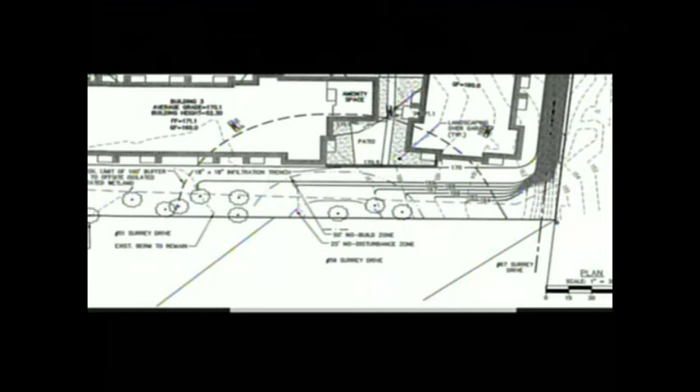In the middle of nowhere, I'm gonna build one for you, Doug. I'm gonna make a model wall for you, put it right on the table. It's actually a nice feature as you're sitting on the patio looking at that farmer's wall. I think if we had a logo, North Andover Conservation Commission, with a field and one of these fieldstone walls right there, that could be our logo.

You guys have fertile lots here. So what's a 2 by 2 by what? Roughly 2 by 2, plus or minus. What we could do is, you guys like that wall, which is really done by a stonemason. It looks good. Doug, I want you to come visit, and I'm gonna show you the walls we're talking about.

How long have you been living in New England? He doesn't really know what a farmer's wall looks like. And what you guys want is not a farmer's wall. That's not true.

Offline, we'll talk about the history again. The walls you find in the fields are built by farmers who take the rocks out of the fields and put them along the edges like that. On average they're about 2 feet high and about 2 feet across the bottom. That's all we're looking for. There are 15 acres, right?

There's no conformity to it. Okay, we all said how we do. Any more questions? Any more modifications?

No. Okay, I move that we issue NACC number 240 as amended. Second. All those in favor say aye. Aye. Opposed? That's unanimous. Thank you again.